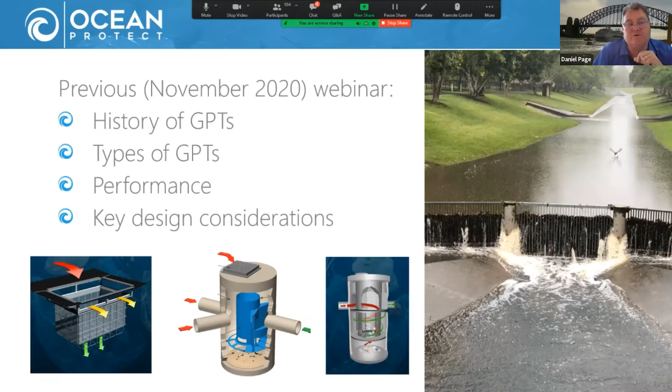The first bit of information we're going to revisit is the actual types of GPTs. You can see a few pictures of types of GPTs here, but they are grouped. So the question is: how is the OceanSave different to other GPTs? Hence we need to know what the GPT groupings are.

This question reminds me of a discussion I had some months ago with a young engineer, when I was explaining the differences between the various types of GPTs. He stopped me and asked what I meant by saying that oils ain't oils and GPTs ain't GPTs. I realized that a common engineering saying from the 1980s and 1990s has since been lost in recent decades. So for the benefit of younger engineers tuned in today, I'll say it again: oils ain't oils and GPTs ain't GPTs. That's going to be a bit of a theme running through.

A little bit of help: I'm going to give you a video snippet. It's an old advertising campaign done by the Castrol oil company. It went a long way towards raising engineering excellence and the development and refinement of engine oils back in the day. The Oils Ain't Oils advertising campaign, for those who remember it, expanded across the world and became a full series, running for almost 10 years. For those who are Midnight Oil fans, in recent years there's been a cover band called Oils Ain't Oils, who adopted that slogan.

Sol, you are in a deep trance. Now repeat after me: oils is oils. No, oils ain't oils. You can't resist, Sol. But GTX protects engines, reduces friction. It's worth a few extra cents. Okay, great, Mesmo, the game is up. Sol don't use nothing except GTX. And now we're gonna watch you put yourself into a deep trench. You mean a deep... I mean a deep trench. And remember, soils ain't soils.

And that's where the saying GPTs ain't GPTs comes from. Over to Damien. So the message of this first part of the presentation is: GPTs ain't GPTs.

How do we explain different types of GPTs? There are 5 broad categories of GPTs that we've drawn and defined from the Australian Stormwater Industry Association Technical Guide of 2010, because we need to define these categories in some way. The OceanSave is part of the indirect screening GPT group, which contains a non-blocking screen.

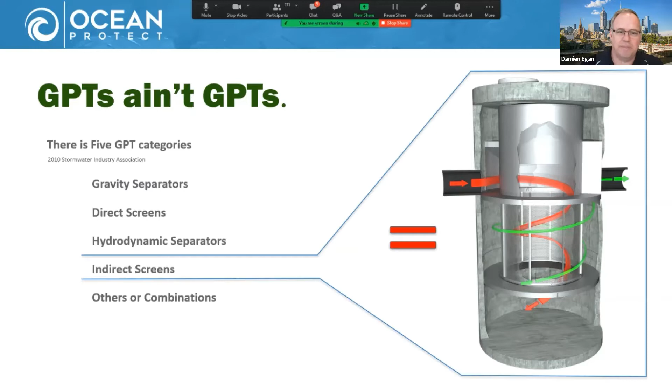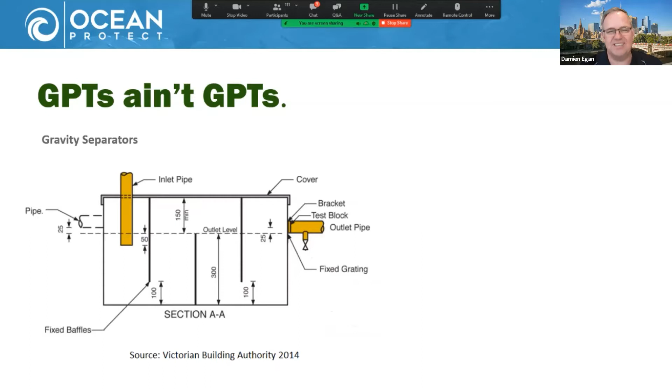Gravity separators basically work by extending the flow path through the system, leading to a reduction in flow velocity, and in accordance with Stokes' law, this causes a separation of pollutants based on their specific gravity. But these types of systems are not fantastic at stopping neutrally buoyant materials, like shopping bags and chip packets. A gravity separator is not an OceanSave.

Direct screening is typically the use of a physical vertical barrier to capture pollutants. When pollutants hit the screen, the design flow rate quickly decreases as the screen blocks up. Some examples of this are generic trash racks, which can often be one-off designs.

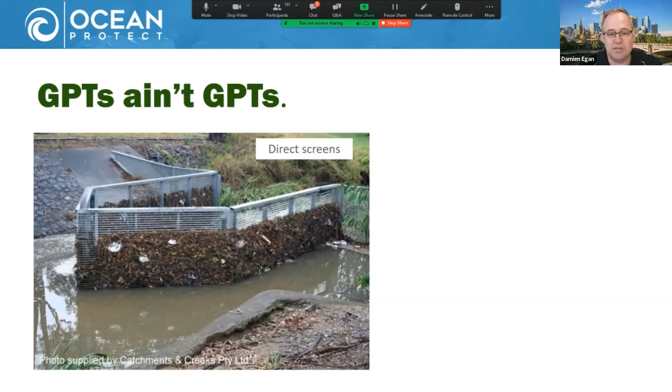Vertical screens are supposed to let pollutants fall down through gravity at the end of a rainfall event, but in practice these pollutants tend to grab into the screen and work their way into the gaps, requiring regular maintenance to physically scrape them clean. These categories of products also include NetTech, Rocla CleanSall, HumeGuard, Stormceptor, and EcoSol GPTs. But a direct screening GPT is not an OceanSave.

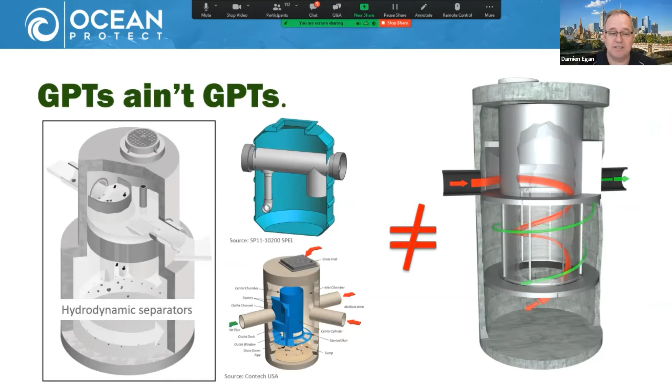Hydrodynamic separators are similar in some ways to a gravity separator. They work on the principle of extending the flow path, leading to a slowing of the flow velocity. They're much more smartly designed, with a very long flow path, and are much better at capturing coarse sediments, hydrocarbons, and oils. But they do not have a screen, and therefore are not great at capturing litter. Examples include the USA Stormceptor, Humeceptor, Ecoceptor, Cascade, Downstream Defender, and VortSentry. But hydrodynamic separators are also not an OceanSave.

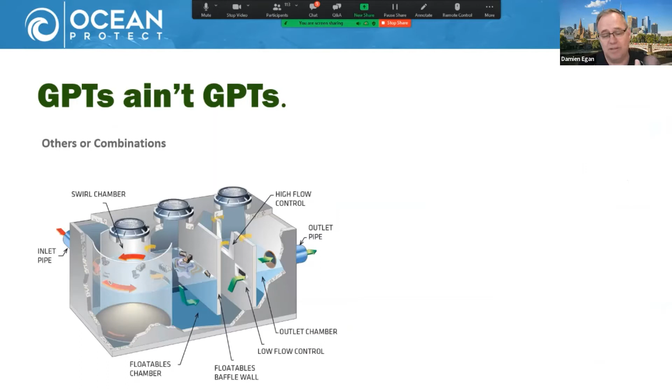Combinations are another category, a combination of the previous categories. Not many products fall into this range. One that comes to mind is the Vortechs system, which is a combination of a hydrodynamic separator and a gravity separator. But a combination GPT is not an OceanSave.

As previously stated, the OceanSave is an indirect screening GPT, and it's the product for today's discussion. It's estimated that since 1993, over 7,000 indirect screening technology GPTs have been installed within Australia and over 35,000 in the USA, making this type of GPT one of the oldest and most widely used technologies worldwide.

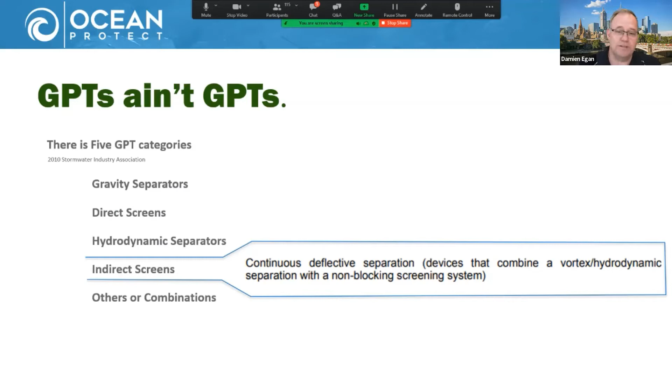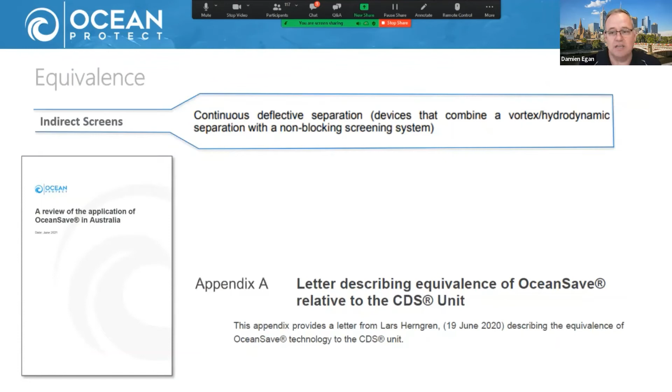Equivalence: each of the OceanSave's products have what we call a white paper, containing information regarding the background, operation, and maintenance of those products, and Brad is going to provide that link. In the white paper for the OceanSave, there's a letter from a third-party engineer stating that the OceanSave is a device technically equivalent in functionality to the CDS unit.

Now on to best management practice. The first thing to consider is: what is the actual outcome you want to achieve by applying these practices? In the presentation here, you can see a photo of a recent development undertaken by Fraser's Property Group over the last couple of years.

It's the Shellharbour Council, the construction of an entire new suburb. It's also a harbour precinct, a whole new harbour that's just recently been handed over to the council, in New South Wales. It's fairly easy to work out the desired outcome for this project: to protect that harbour in front of you and to provide a clean, healthy environment for the general public and the people who live in that area.

But how do we actually do this? In this case, Fraser's and the design team proposed various GPTs, coupled with tertiary treatment filters, wetlands, basins, bioretention systems, and so forth. The OceanSave indirect screening GPT was designed and installed at multiple locations throughout the development. They have been protecting the harbour not only during construction, but will continue to provide this protection for many years to come.

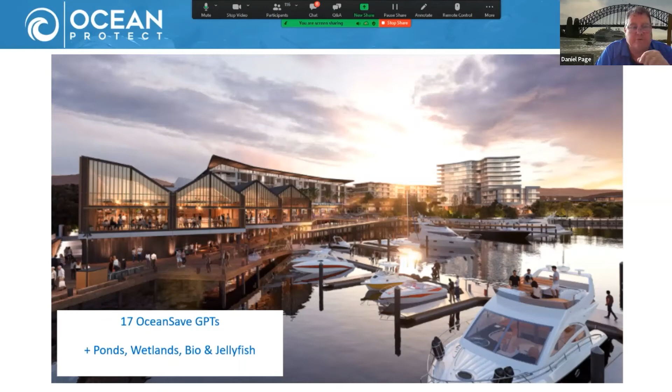This brings us to what is an OceanSave GPT. Today we're going to look at the basic principles and innovative design of the OceanSave GPT. To begin with, it's a durable, strong precast concrete cylinder tank, built to Australian standards. It has a special cylindrical directional screen located in a separate screening zone, with a separate sump and floatable storage area.

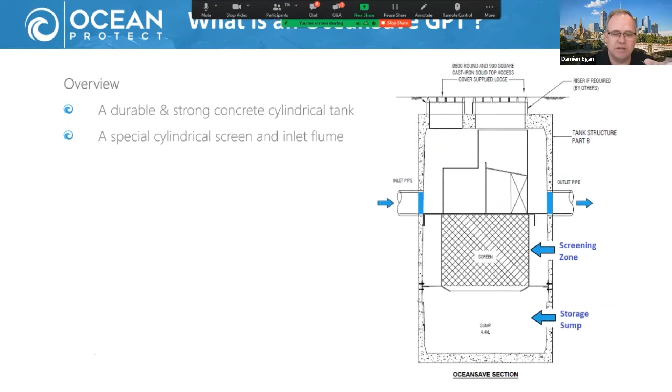It's obviously a very high-performing GPT based on Australian indirect screening technology, and it incorporates design improvements from the USA and Europe. It's a GPT that is very easy to inspect and clean, and it's ideal for protecting our precious waterways and sensitive environments.

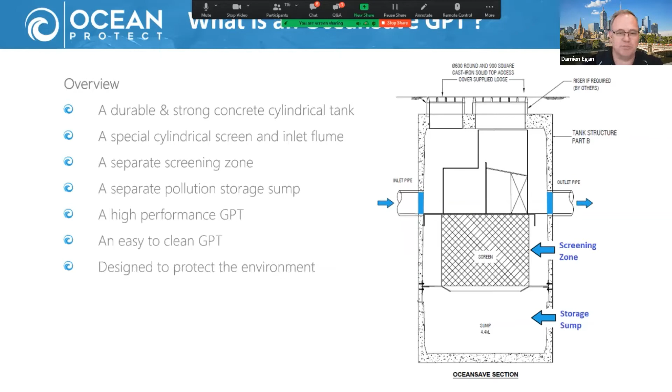The heart of the OceanSave is the screen. It's somewhat similar to the food grater you find in your kitchen - corrugated and smooth in the direction of flow, but grated in the opposite direction.

The development of the screen was the most difficult part of the original development of the technology. It was only after a significant amount of time, trial, error, testing and retesting that a suitable screen was developed, which is the final screen used today.

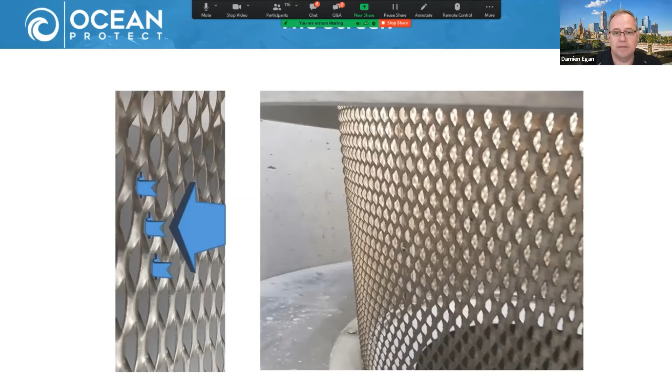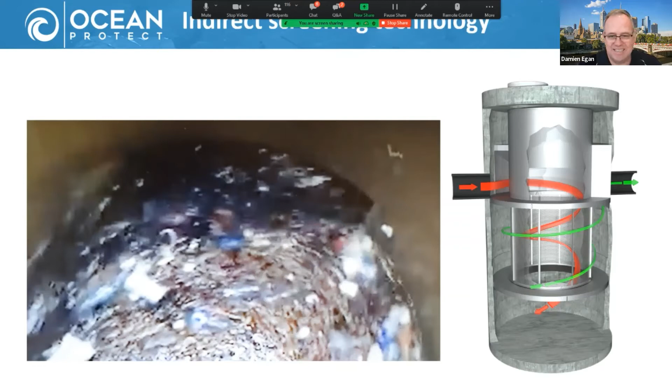The schematic on the right is of the OceanSave GPT. The red arrow shows the flow of stormwater into the GPT, directed into the screening zone, then the clean water passing through the screen and onto the environment. It is indirect screening technology, meaning the screening process is controlled in a way that keeps pollutants in motion and keeps the screen clear for maximum cleaning performance.

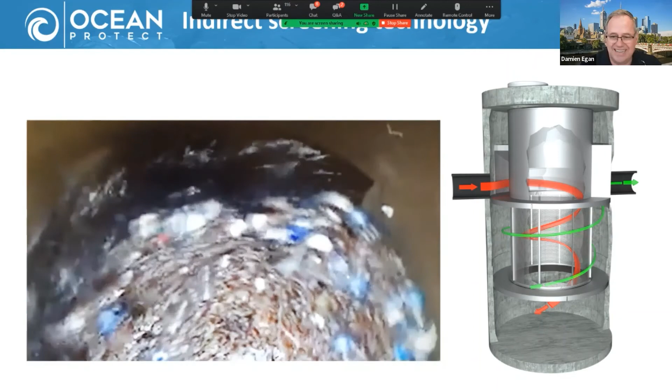You can best see this on the video - the pollutants swirling around in the treatment chamber. In the next slides, we'll see how the pollutant enters the GPT and follows a helical path to the sump area.

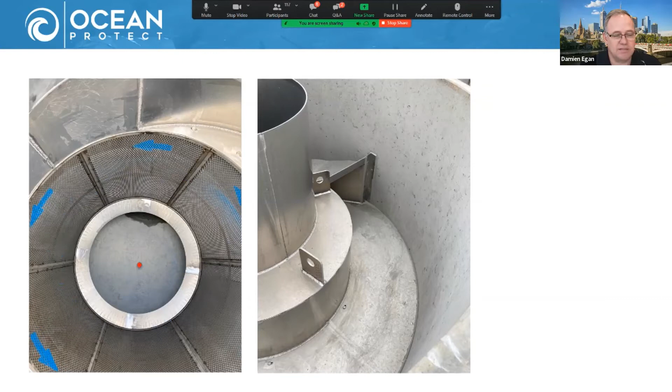Here we see a little red ball - we've got to assume this is probably at a dog park, and little Fido's lost his ball. It comes into the inlet area of the GPT, directed down the inlet flume, and follows a helical path across the face of the screen, all the way down to the sump area. Much to the distress of Fido, he's lost his tennis ball.

Let's talk about some aspects of the OceanSave. It allows for multiple inlets and outlets at varying heights. The inlets can be positioned anywhere around a 180-degree arc, allowing much greater flexibility when designing stormwater systems with the OceanSave GPT.

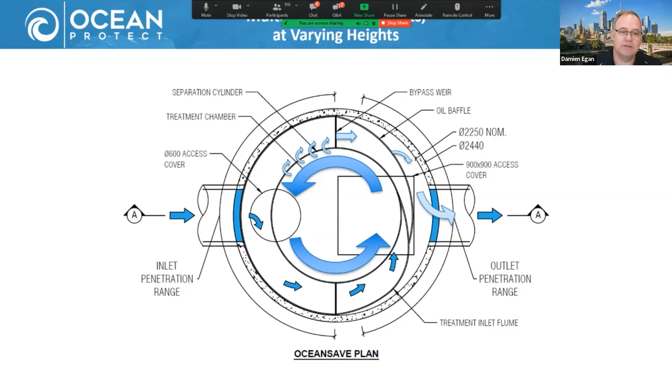The OceanSave GPT has two unique advantages that no other indirect screening GPT can offer. One is that the OceanSave can be designed for flow splitting, and it can also be designed as a junction pit.

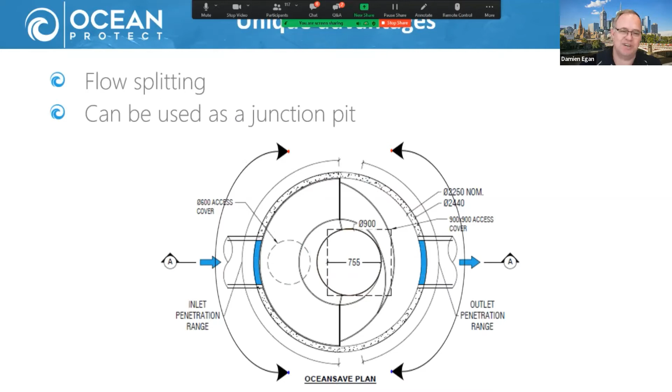The OceanSave GPT is available as an online or offline configuration, depending on the maximum flow rate. The system is available as an online configuration across the full range of models.

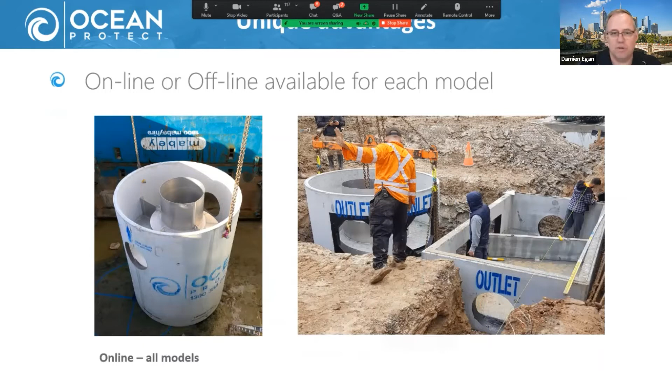The other main advantage of the OceanSave GPT is the minimal number of components. In an online configuration, you're talking about 2 to 3 components maximum. For an offline system, you're talking about 4 or 5 components in total.

Even in our very largest system, the 3.5 metre, approximately 6 metre high, pre-assembly means the only connection required on site is a few bolts. This means minimal on-site assembly, quicker installation time, and less time with an open excavation on site.

Which is very important because the rain's coming over right now - if you had an open excavation, you'd be in trouble. The units are load bearing in their own right, so there's no in situ concrete required at all.

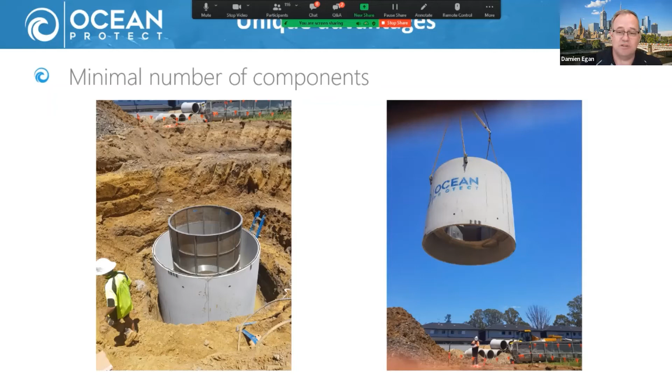This is just a short video - a bird's eye view of an OceanSave 1112 being unloaded for a project in southeast Melbourne. This was part of a treatment train, the pre-treatment before the wetland.

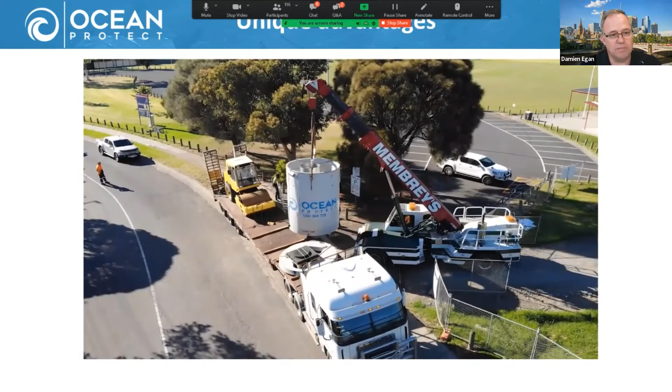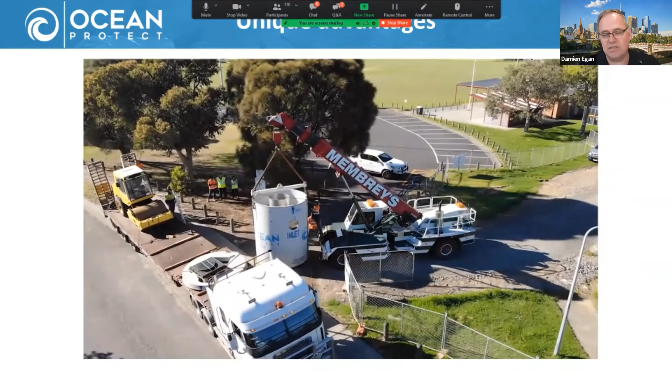The 1112 is made up of only 2 components - basically the 2 parts you can see here. The OceanSave substituted a system that was specified for this job that had 13 parts and a whole bunch of other stitch areas of in situ concrete.

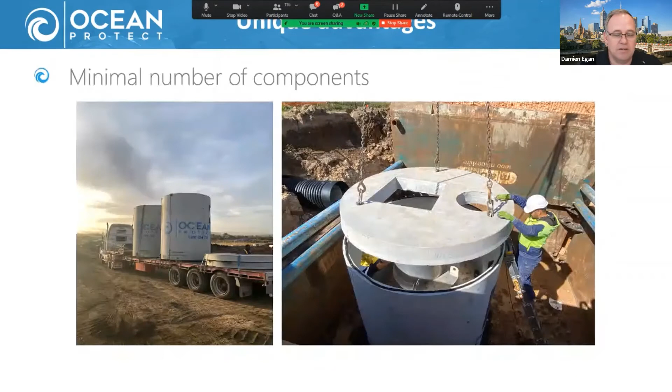The civil contractor on this job was quite thrilled with the process for them at the end of the day. Simplicity is the key, minimal number of components. Just another shot showing how simply that's done, with all the pre-assembly done in that bottom unit completely.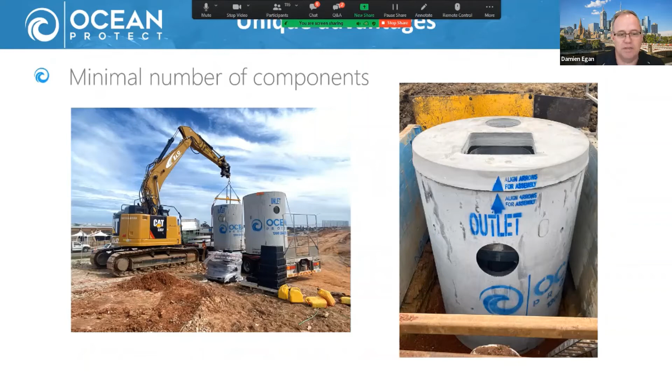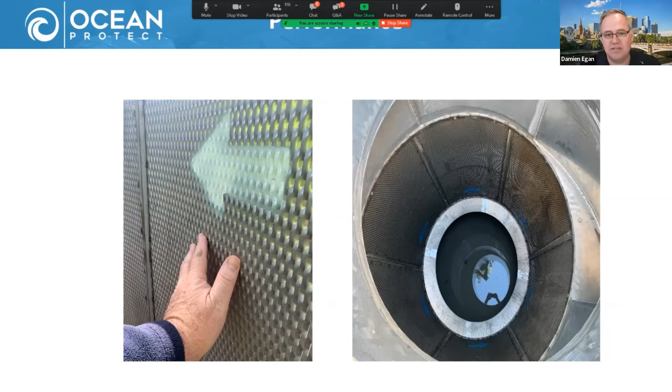Just another view of another project. As noted previously, this technology has been available for 27 years, and Daniel's going to be discussing some more of the performance aspects of the OceanSave GPT.

Damien, the performance of the OceanSave indirect screening process has been conservatively based on independent research information. It's the same information currently adopted by many council regulators and the water quality design and modelling programs used today. It's been tabulated here and contained within the standard MUSIC notes, available from Ocean Protect directly or downloadable from MusicLink.

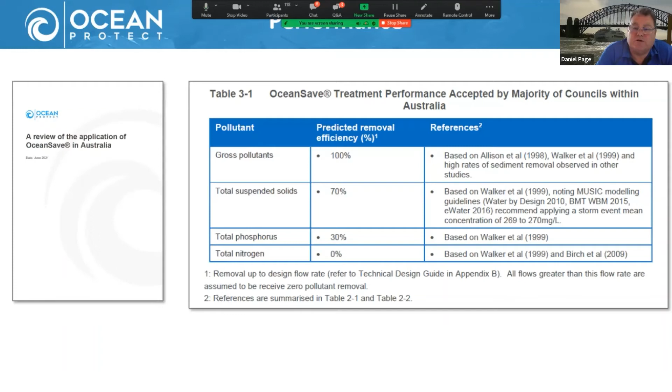What's noticeable here is that nitrogen is listed as 0. Although it's possible to have a net positive removal of some nitrogen from the GPTs, they generally require regular maintenance to do this, and the value can be as high as 20%. However, the nitrogen removal that Ocean Protect is adopting is 0, to match the Blacktown City Council guidelines and their modelling for all the indirect screening GPTs they apply.

You should consider the location layout, the design flow rates, the desired outcomes, as well as factors such as your bypass flow and extreme conditions you may need to allow for. It needs to consider the pollution removal performances you're trying to reach, and obviously needs to be sized for the amount of pollutants and pollution loads expected from the site to be captured.

It also needs some thought when you locate the GPT, because these things have to be maintained on an ongoing basis. So you've got to consider the cost and frequency of this maintenance. If you're only designing the GPT purely off the size of the pipe coming down your catchment area, I'd suggest that this is not applying best practice.

Now, maintenance is not a new thing. GPTs are designed to capture pollutants, and therefore at some point you will need to remove the pollutants you capture. It needs to be done at a fairly regular timing—sometimes it might be 3 months, 6 months, once a year, twice a year, whatever. So you will need to get a truck and personnel to the site of the GPT. The consideration of maintenance is best management practice.

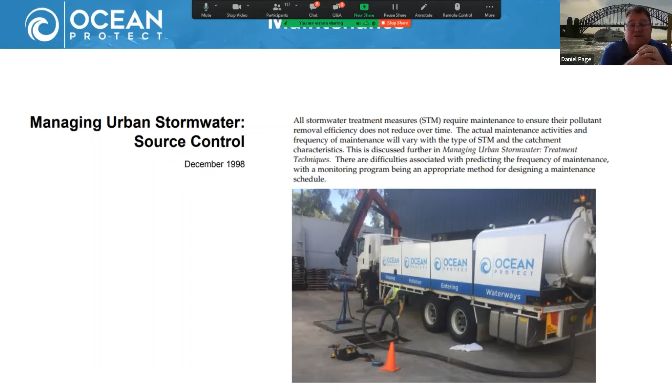The reality of not appropriately maintaining a GPT is that the effectiveness can be significantly diminished. If you just leave a GPT full of sediment and so on, then you end up causing more pollution to your downstream environment instead of the protection you're actually aiming for.

To help those online here, there was a Stormwater New South Wales guideline for maintenance of stormwater treatment measures, released last year, around mid to end last year. It's very helpful in gaining a good overall understanding of the full range of not only GPTs but treatment systems available in the market, and also the pitfalls and issues past designers and asset owners have encountered. I encourage any asset owners on today to check out this document, as they'll gain a better understanding of how their efforts to keep a GPT clean and ready for the next rain event actually help protect our waterways.

Now, some council engineers or asset owners may find the GPT selection process a little daunting, a little difficult, and for some specific catchment areas or locations, you may need help.

Again, you've got your offline arrangement where you have a diversion box and you divert to an offline tank on the side with a treatment system in it. Again, you can have a left or right in this, and you can make these change and go at different angles.

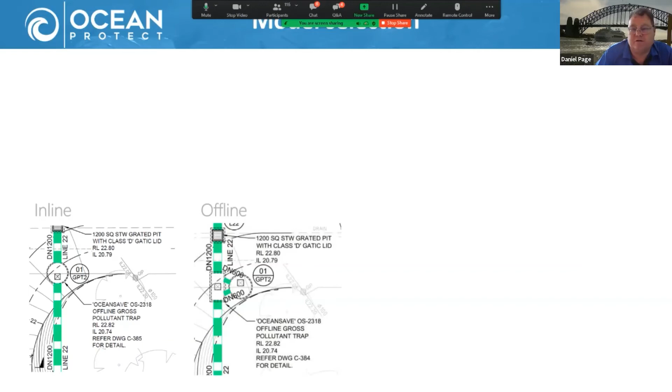Lots of different variability in how you design and configure these on site. You also have flow split, which Damien mentioned. So here's an example or two of flow splitting to a bioretention system, whether using a diversion box at the line, or an upstream diversion system into an inline unit. There's lots of different ways.

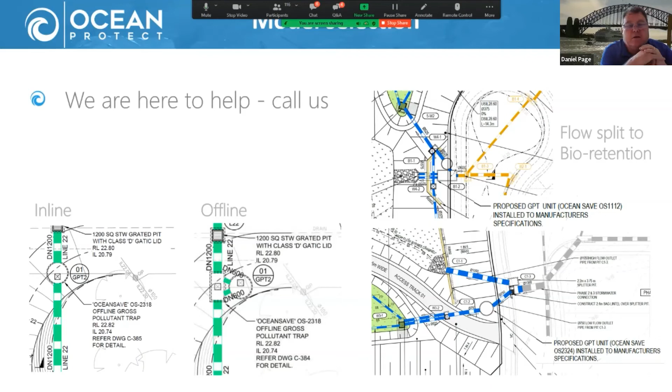All right, now it's time to wake up because I'm on the summary page. If you want to read the basic summaries, we've already talked about them, they're there in front of you. But I will say, I suppose I am a little biased, but I reckon that the OceanSave is the best indirect screening GPT currently available on the market today. It has some good advantages over similar indirect screening GPTs, and it's got plenty of technical advantages over the other types of GPTs we previously discussed.

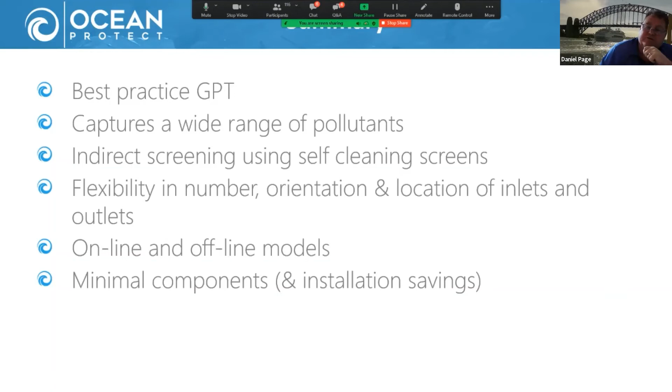Hence, I still believe the relevance of the old oils ain't oils slogan from the 90s, and GPTs ain't GPTs. I thank you for your time. I look forward to answering any questions you might have.

Thank you. Thank you, Daniel. Thank you, Damien. Wonderful presentation and bang on 20 minutes. I know both of these gentlemen can almost talk underwater all day on the OceanSave GPT, so they've done very well to keep us to time.